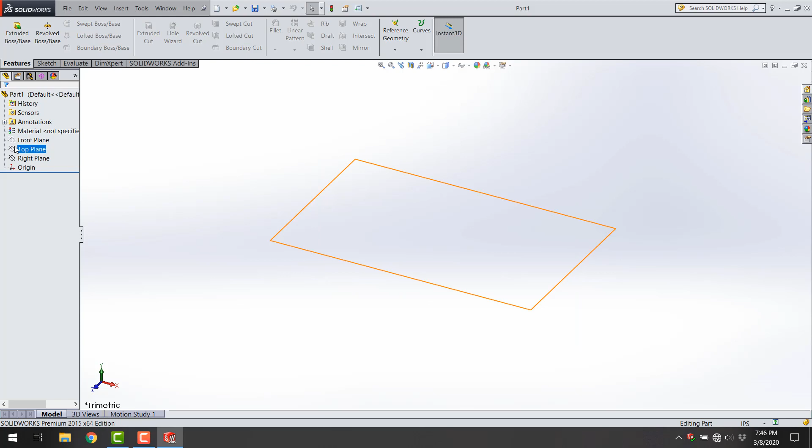Let's pretend this will be our top plane, which we'll use for our print. Let's create a rectangle boss, but make it a center rectangle. Click this one, click in the center on the origin, and bring that out. So this is our rectangle.

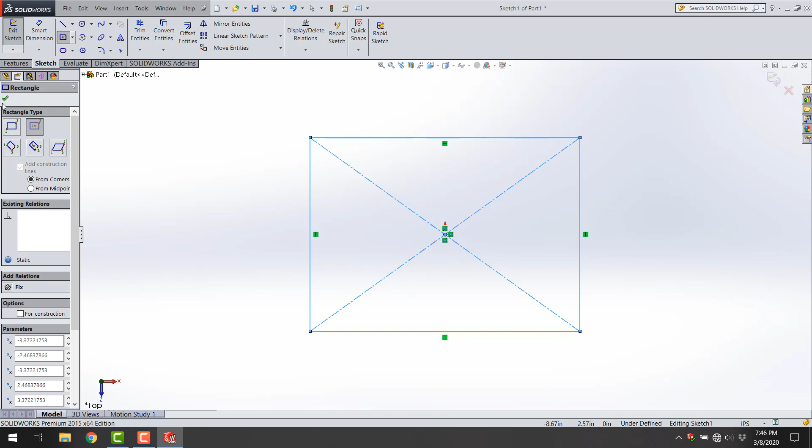We'll go to Smart Dimension, and here you can pick how big you want to make your rectangular boss. Let's just say 4 inches tall, and let's call it 5 inches wide.

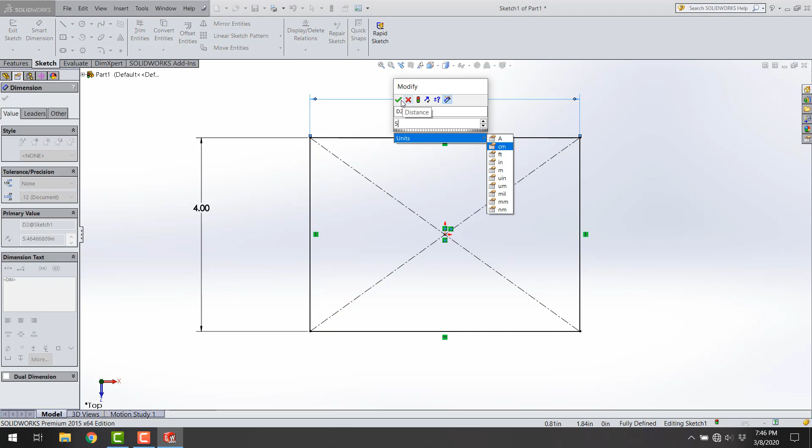Now we'll say okay, everything's black, which is good. How far do we want to extrude this? Let's say 1/4 of an inch, so that's 0.25. And we'll say okay, and yeah, we'll start okay.

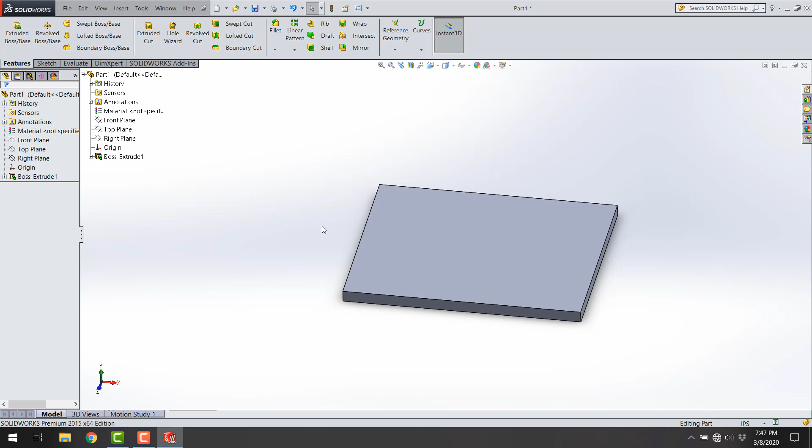Okay, so now we have this, which could be what the features are placed on. So we'll create some more bosses on this face. A good easy way to change your view is to push the space bar, which brings up this orientation window.

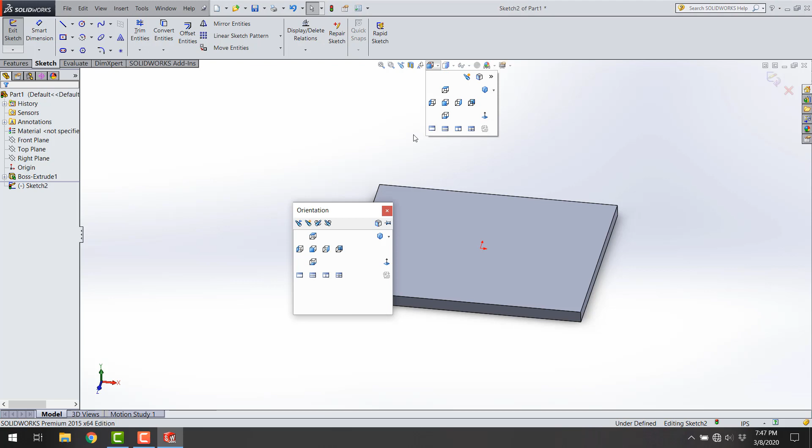This orientation window is basically just this window. So space bar brings it up, and if you click normal, it brings up the view that you're in if you're in a sketch, it'll bring up the normal view.

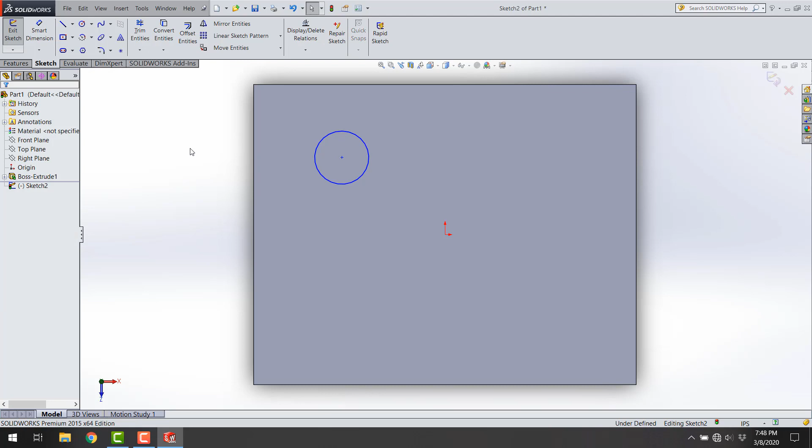So here let's make a face. We'll use the circle, and we'll make a circle for the eye. We'll do the Smart Dimension and let's make it 1 inch.

We want to dimension this from probably the center of this piece, so let's make a center line from here and straight up, and we can hit escape or double click. If you notice, I drew that line and it went black immediately. That's because I picked the origin, which is a known reference point, and I snapped to the middle of this line, which is also a known reference point. So if you go from reference point to reference point, it's going to automatically assume that you want it to snap to those points.

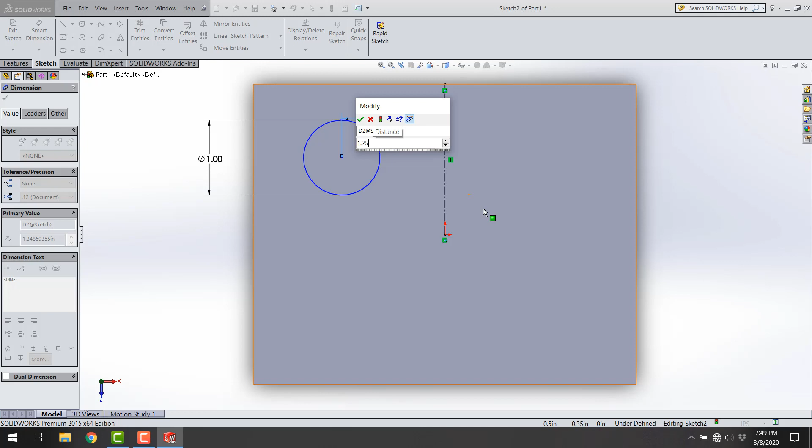So that's immediately black. Now let's pick Smart Dimension. We'll click on the center of the circle to the center line. Let's make it 1.25 inches. That looks good. So then we want it still blue, so let's dimension it from the center of the circle to the top line, and that is 1 inch. Okay, so now we have one eye.

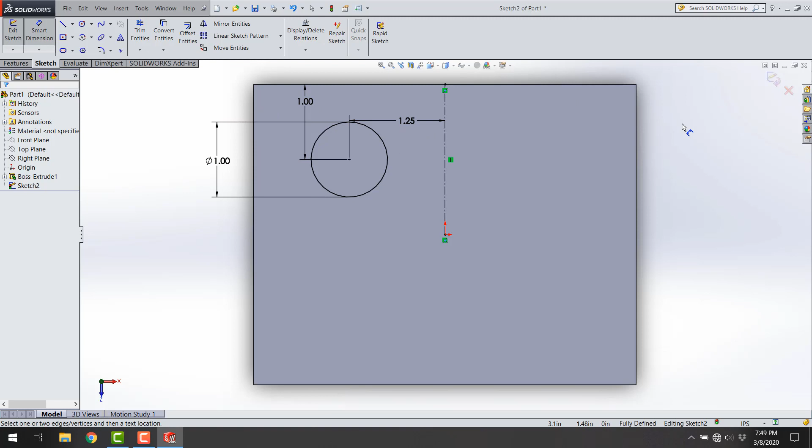So let's just click OK. There's a couple ways to do this. We could draw another circle here and create more dimensions, but then if you ever want to change it, you have to change many dimensions every time you want to change the face. So let's assume we want both eyes to be the same distance from the center. Let's say OK, so we're going to create this feature. Let's just make it 1/2 inch for now, and let's say we want to make this edge round for now.

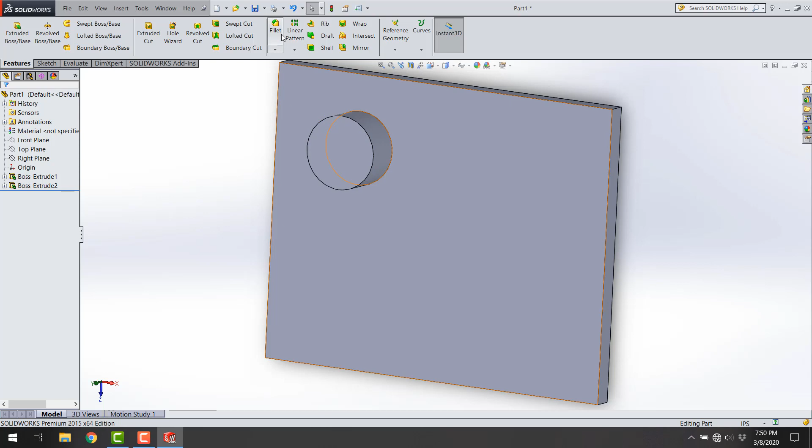One way to do that is to create a fillet. Fillet just means a rounded edge. So just a couple ways: you can click on the fillet button, then click on the edge you want to fillet, and say OK. And it'll round that edge.

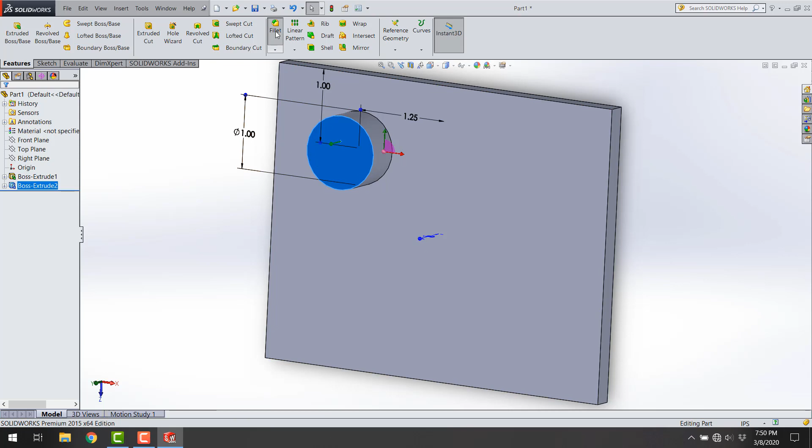If we want to do it a different way, let's delete that. We can say pick the face instead. If you pick a face, it'll round all the edges touching that face. So we can even pick the face first and then the fillet button, and it'll automatically put that face in here and say OK. This does the same thing.

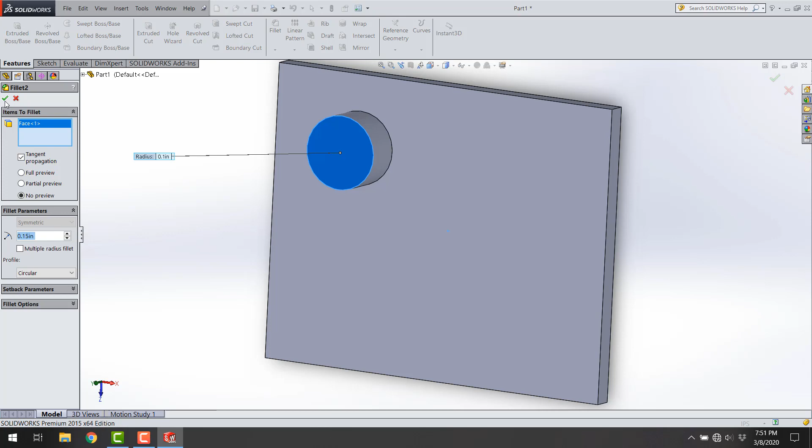We can also cancel. If you right click and click this button to edit the feature, we can change the size of the fillet. Let's make it a little bit bigger and say okay. So then you see it's a little bit bigger, but we have to be careful. If you make it too big, let's say 1 inch, it won't work because there's not enough room to make it that big. So let's go back and make it smaller and see if that works. That looks okay, we can change it later if we want.

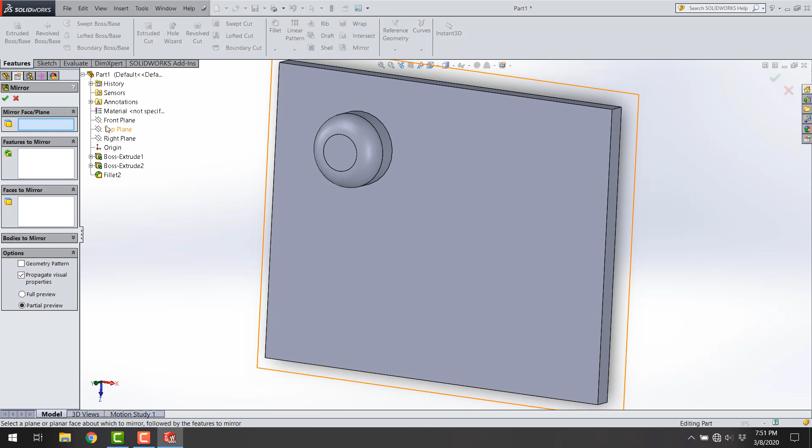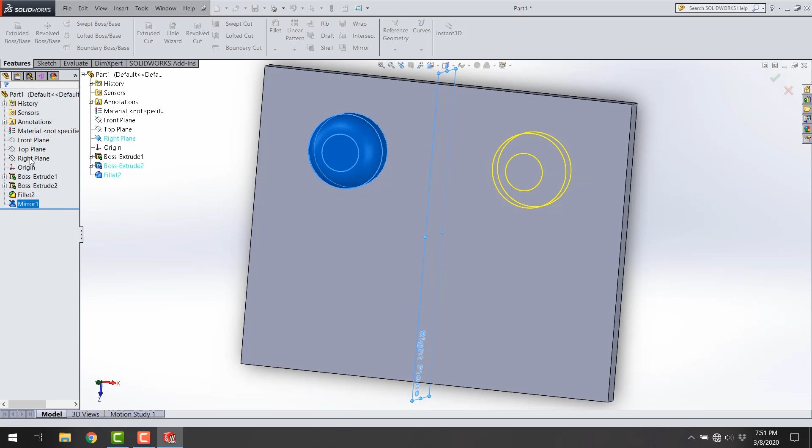Now, instead of doing the same thing over here, we can use this feature called mirror. We say mirror, and we pick the plane that we want it to mirror across. We want that other eye over here, so we'll pick the right plane, and it's going to make a copy of the features we select across that plane. So we select the boss and the fillet to create this eye over here and say okay. So now you've got 2 eyes.

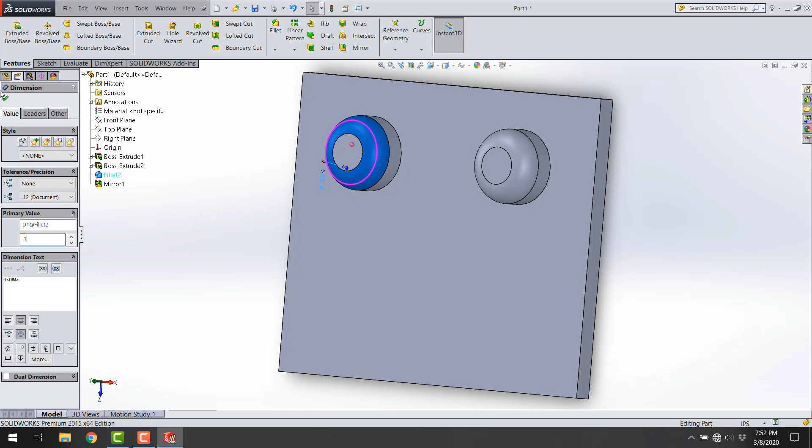The neat thing about this is if you change the dimension here—you can change dimensions by double clicking on the feature itself—you can see it'll pull up. This is the 0.25 radius of this fillet. If you change it here, let's change it to 0.1, say okay, and then refresh. Now it changes both eyes at the same time, so you don't have to do it multiple times. We can change that back to something larger, make it a bigger size, whatever you like.

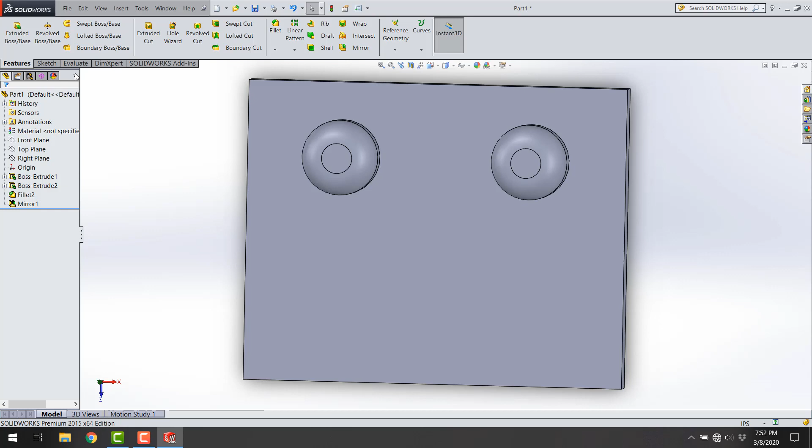So there's our 2 eyes. Now let's see how we want to make, let's say, a mouth. So let's go to sketch.

We're going to enter sketch mode, and because we already selected that surface, that's the plane that it's going to be used as our reference. So we can hit the spacebar again. Now we're normal to that view.

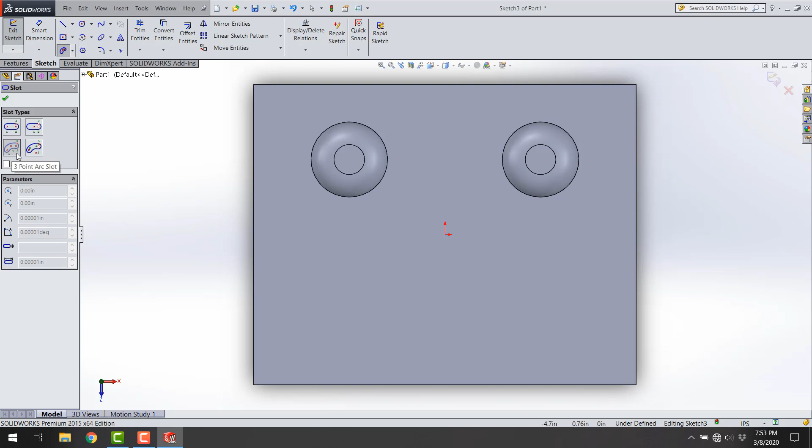Let's see, what's a good way to make a smile? So let's pick this one. This looks like a 3-point arc slot. It says 1, 2, and the third click is in the middle. So let's give it a try.

So let's say we want the smile here. This is the second one and third one in the middle. So we can make a happy face or a sad face. Let's make a happy face. So that's my third point.

So that's creating my arc, right? So 1, 2, 3 was creating the first arc. Then when I move my mouse, that determines how big I want the smile to be, or this slot to be. This is a slot feature. So if I click it again here, I create a slot.

So I should click the check mark. Now I've got a smiley face. It's blue right now, but I want it to be black. So I can do this a couple ways.

One, let's make the center point. We'll click on this and control click on the origin, and call it make it vertical. So now this point and this point will be vertical. So now I can't move this point sideways, it's always going to go up or down.

Then if I click this point and control click the other point... oops, I'll click one point, control click the other point. It's not doing what I want it to do.

Let's see. Well, let's say we can make this point, and this point, let's call that one horizontal. So now the smile will always be centered.

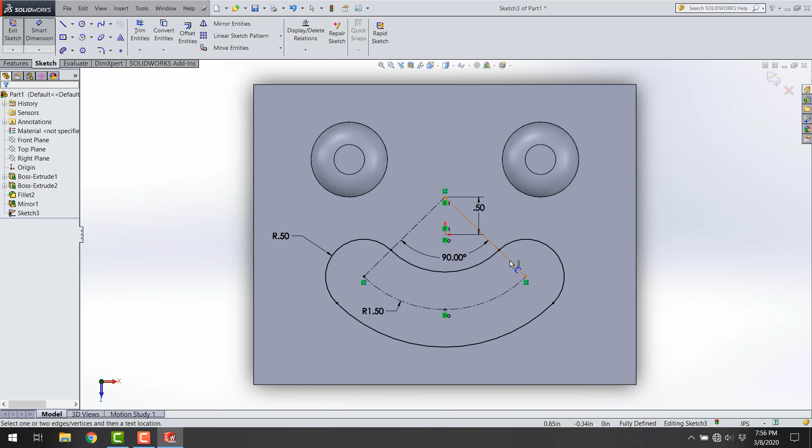So all these dotted ones are just for reference. They're not going to be actually part of our sketch that is extruded. Only the black lines, solid black lines, will be extruded. You'll see once I hit OK and extrude.

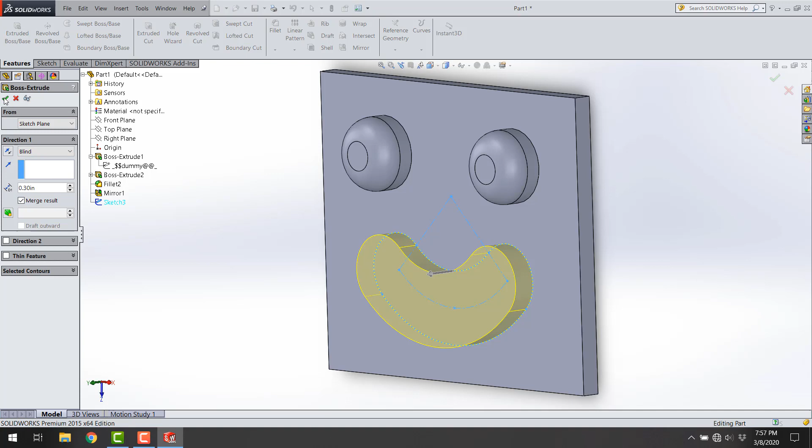So now we can select this sketch, go to features, click on extrude boss or base. So you can see now we have the mouth coming out. Now let's make this, we'll call it 0.3, so the mouth doesn't stick out as much. We can change it if we don't like it. So now we have our mouth.

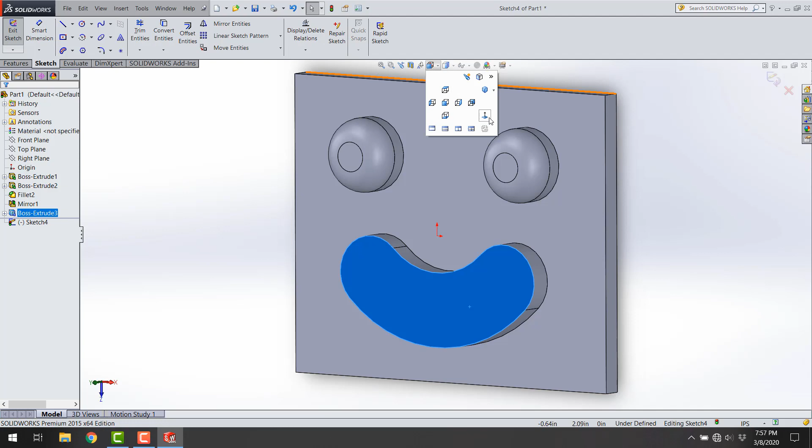Let's make it so the mouth is a little bit open. So this is a couple of new features. Let's select this surface, and we'll go back to sketch again, click on sketch. I'm recording for you guys to learn later. So then I'm going to click normal.

Then I want to use this tool, called offset entities. If I click this, it basically takes the entity you selected and offsets it, and you can keep selecting all the way around like this until it creates another line that's the distance that you tell it away from the original. So let's make this 0.15 and see what that looks like.

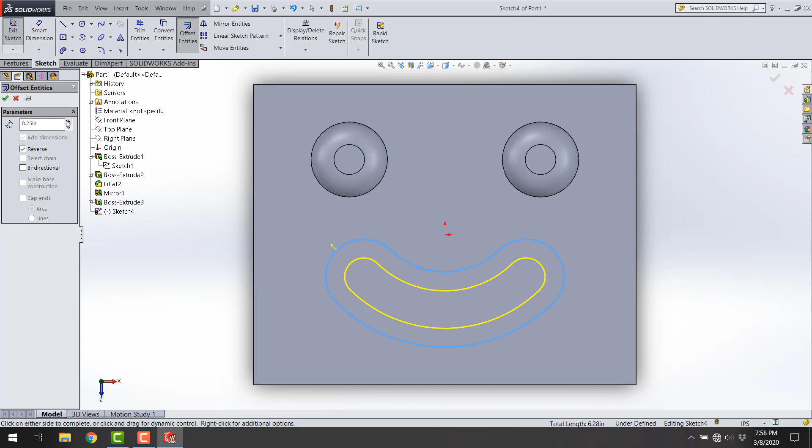Maybe even larger, you can click on this arrow to go a little bit larger. Let's try that, so that's 0.25. We'll say OK. So now, rather than having to redraw that, we can just offset it, and it's just one dimension that we have to change to make it look different later. So let's click OK. Everything's black.

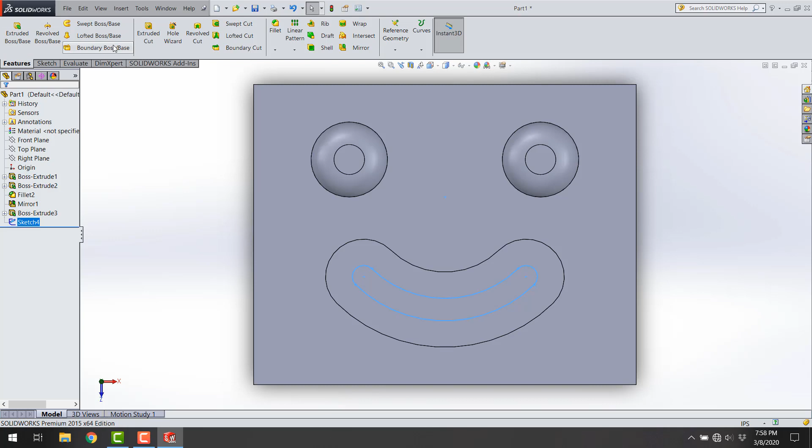It looks good. Now, instead of making it extrude, we're going to say an extruded cut. So we'll click on the extruded cut button. It works the same way, but instead of creating material, it takes material away. So we can leave it at 0.3. Say OK. So now it's taken out the middle of the mouth part.

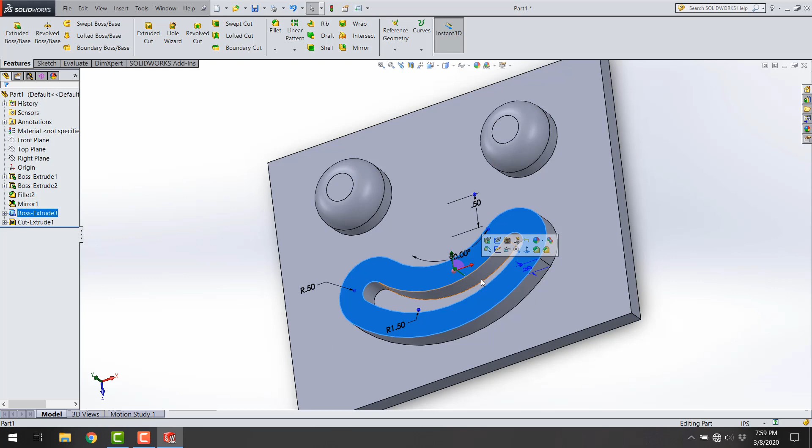Where we had the extruded cut, we can change that too. If we double click on the extruded cut, we see how deep it is. So let's say we don't want it as deep. Let's call it 0.2 and hit the refresh button. And so that's a little bit not as deep.

Okay, so play around with it and see if you can make a face that you like. Maybe try adding a nose and see what that looks like.